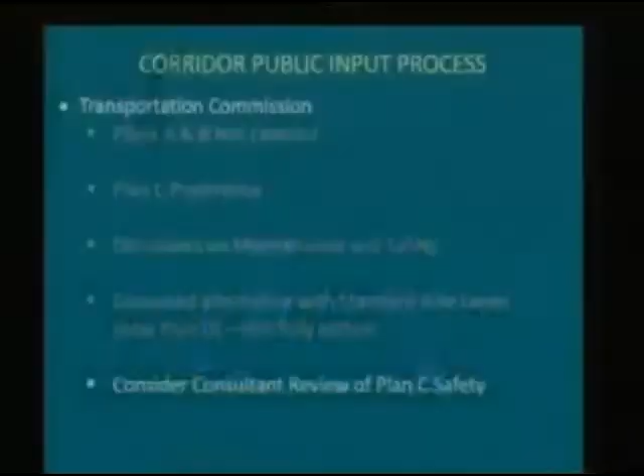They spent some time talking about a suggestion that we consider a consultant review of Plan C safety. The idea here is that with the concern about turning movements and intersection functionality with Plan C and the separated bike lanes, would it be advisable to bring in an outside consultant that is an expert in these things, that does this type of work on a regular basis, to do an assessment of our plan and let us know if they think it's viable and can be safely implemented. That was something that they seemed to like the concept of. They did not take any action with it. It's not part of the recommendation, but it is something that I think did meet with some favor. Ultimately, at the end, after an hour and a half of gyrations on what to do, they went pretty simple.

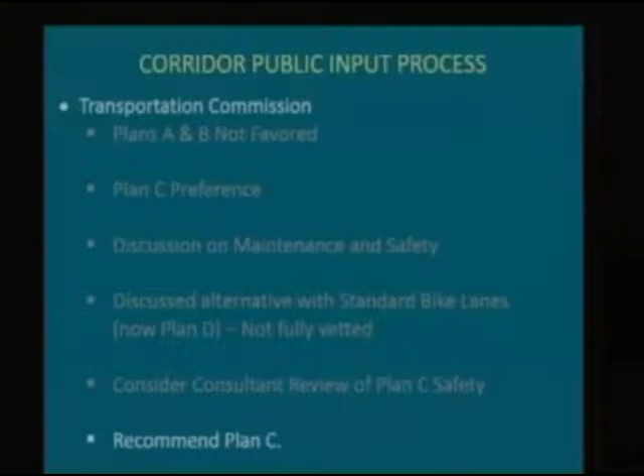And just recommended Plan C. So that is the Transportation Commission recommendation to Plan C. They did ask that we provide a good listing of pros and cons of each of the plans and concepts, and that's what's in your packet this evening. Hopefully that captures the positives and negatives of each of those.

So to talk a little bit about what's in the specific plans, and then we'll talk a little bit about budget, and I'll wrap up.

There are some elements that are common to all four plans. These are things that, regardless of which plan we would choose, if we choose any of these or even an alternative, these are things we would propose be included in any of them. So it's common to all of the plans.

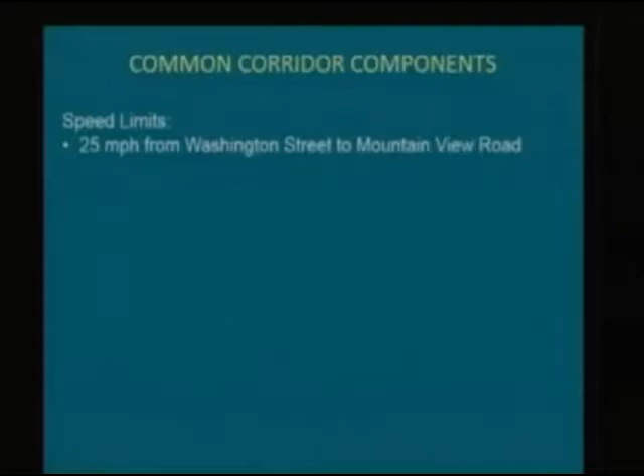First off, speed limits. It was pretty unanimous, I think, everybody we spoke with, that the speed limit which currently is 25 on the west end and shifts to 30 miles per hour in the center section of the corridor from Van Buren over to Hayes, then drops back to 25 miles an hour out to the east, be changed so that it's 25 miles an hour from Washington to Mountain View Road. So we drop that center section from 30 to 25, same speed limit the entire length. I hadn't run across anybody that had any issue with doing that.

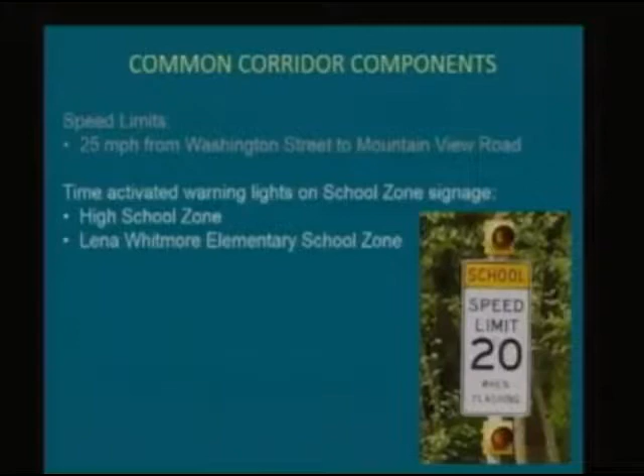One of the concepts, again common to all plans, is adding time-activated warning lights, the kind of bouncing ball light systems, on the school speed zone signs as an added visual cue. When we looked at traffic speeds, the one area where we particularly had problems was at the high school, where speeds were quite a bit higher than they should have been. The rest of the corridor fit the speed limit signs pretty well, but the high school had some issues. So we felt that adding additional lighting on those signs to raise driver awareness that they're in a school zone would be beneficial.

There are two of them, the high school and again at Lena Whitmore Elementary School. We would suggest that these be done on a timer basis. In the morning, just before school starts, they would be on for that period, then turn off. Once school begins, they would start up again and run during lunch, then turn off, then come back again in the afternoon session when school's getting out, and then turn off.

One of the things we've found, and you see a lot in the traffic industry, is if you leave something on constantly, pretty soon it's just background—you don't even see it anymore. A lot of folks probably don't even see the blinking light above Adams Street right now, but it's there. With this, if they come and go, they're more likely to catch your attention. So it's just an added influence.

Again, all plans include raised pedestrian crossings. This is truly a traffic calming measure. The American Public Works Association studies show you can see anywhere from a 12 to 18% decrease in speeds due to these kinds of devices. We're proposing three of them at these locations: the east side of the Adams Street intersection, the east side of Monroe Street, and the west side of the Cleveland intersection. I'll show you those locations in just a second.

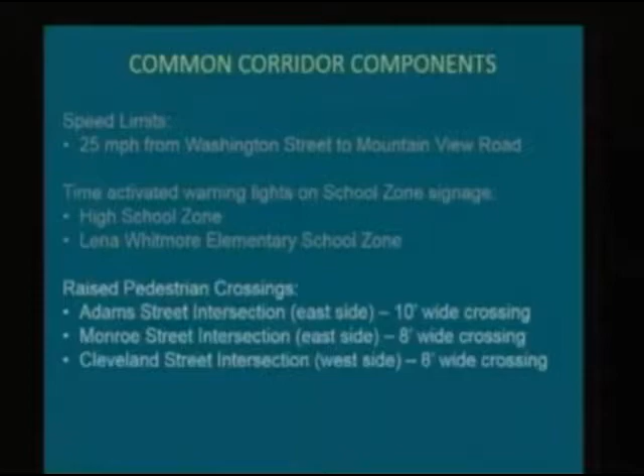A couple of things this will do for you: this vertical element, this ramp, is not very comfortable if you take it too quickly.

The steepness of the ramp can affect that. So you set this up so that if you're going too fast, when your car hits it, it's not a comfortable feeling. That helps slow people down, which is the whole idea of traffic calming. It also, through some of the markings you'll see here, improves overall visibility of pedestrians, which is important in key locations where we'd use this.

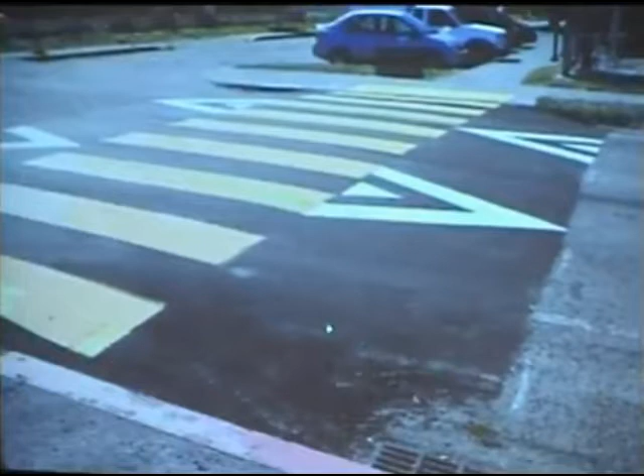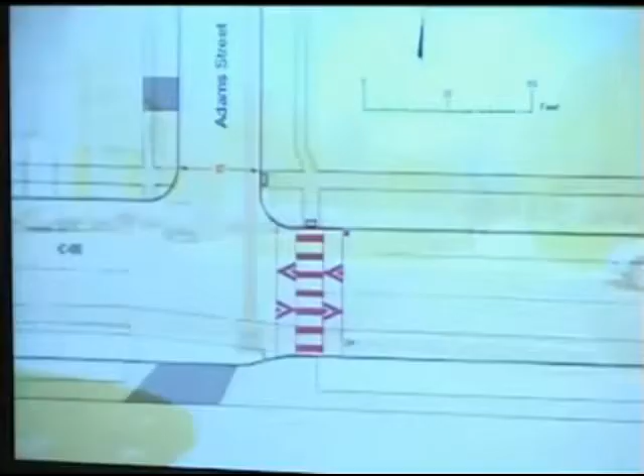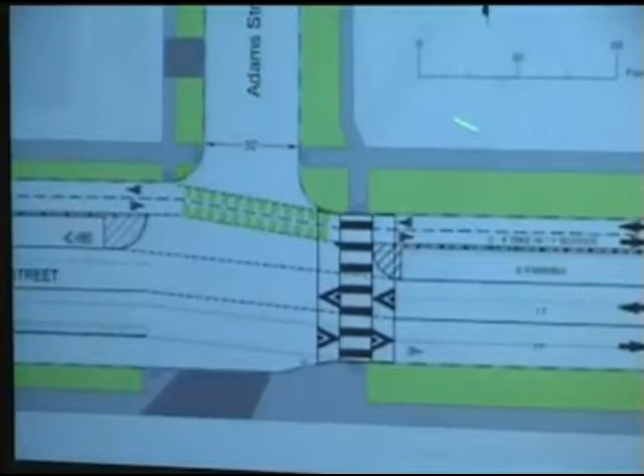Second location would be at, I should back up and tell you, Adams has the high school on the south, 1912 Center here. Very busy crosswalk. This is the southwest corner of East City Park at Monroe. Felt it would be a good location there as well.

This particular drawing is from Plan B, which has some curb bulbs involved. Plan C, again, the bike lanes going through, works well. And the next location then is out at Cleveland. Now Cleveland is on the east side of Lena Whitmore, behind the park area and the playground. There's a lot of kids that come up this way to the back of the school. So that was why they chose this third location as a spot for a raised pedestrian crossing.

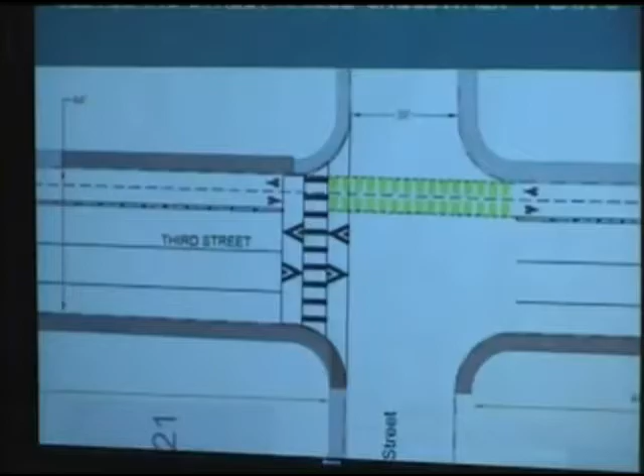Okay, other common corridor components: intersection traffic control. There was fairly unanimous discussion about changing the traffic control at Hayes and Blaine Street intersections to four-way stop control. Now today, at the Hayes intersection, the third street stops, Hayes does not. At the Blaine intersection, same thing, the third street stops, and Blaine does not. These two intersections were seen as pretty important locations with high pedestrian traffic.

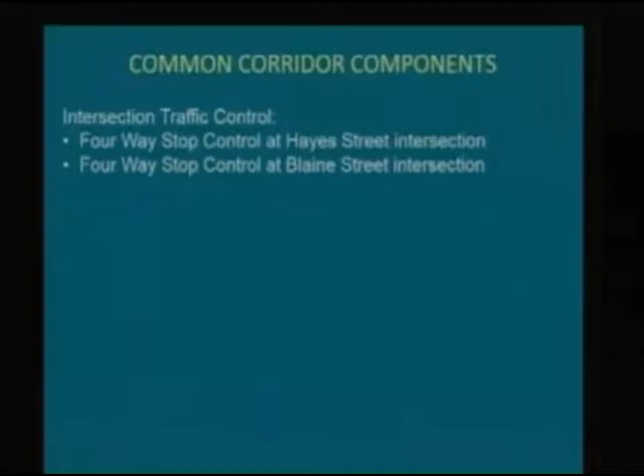Generally speaking, the Hayes intersection is likely to see fairly even vehicle load distributions coming from north-south versus east-west. Four-way stops work well in those situations, but it's also another method for improving overall pedestrian safety at those busy intersections. Blaine is just south of Lena Whitmore, with lots of elementary school kids going through there, so we felt that was a good place to put some emphasis on managing traffic and traffic speeds.

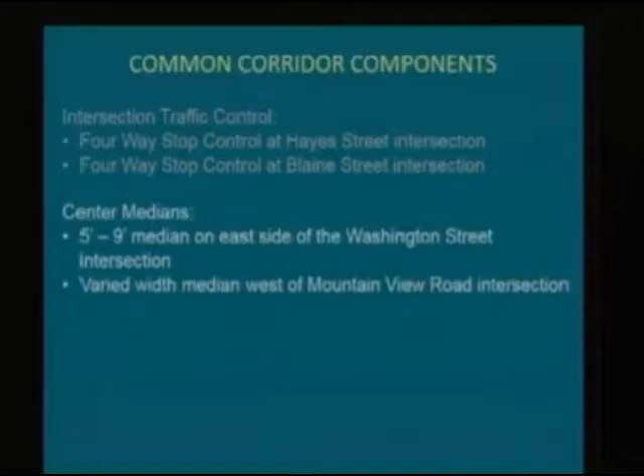Center medians, both ends, 5 foot wide to 9, actually even to 10 foot wide now, optioned for a median on the west end at the Washington Street... we didn't get that fixed, that's the Jefferson Street intersection, and then one near Mountain View Road.

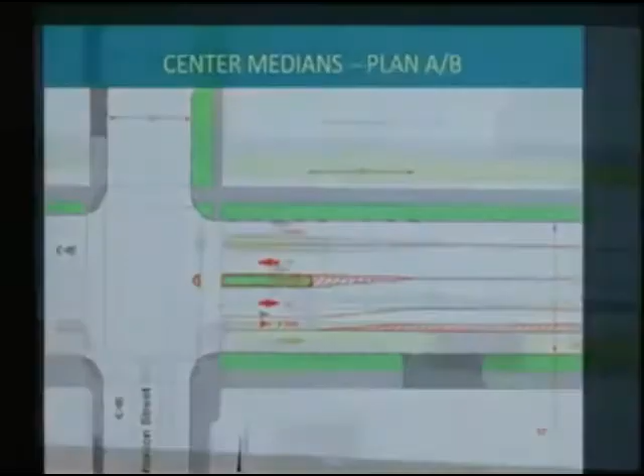Just some quick shots. This would be the 5 foot type median located just east of the Jefferson Street intersection with the crosswalk cutting through it, and some realignment through here.

A wider version, which does require removing some parking on the north side, but it gives you a much wider median. It creates a pedestrian refuge, enough width that a pedestrian can come out on the crosswalk and wait for a vehicle to see them and stop, out of traffic, so there's some protection there. The wider one gives us more options to create that entryway into this residential and institutional neighborhood as you're coming out of the downtown business district.

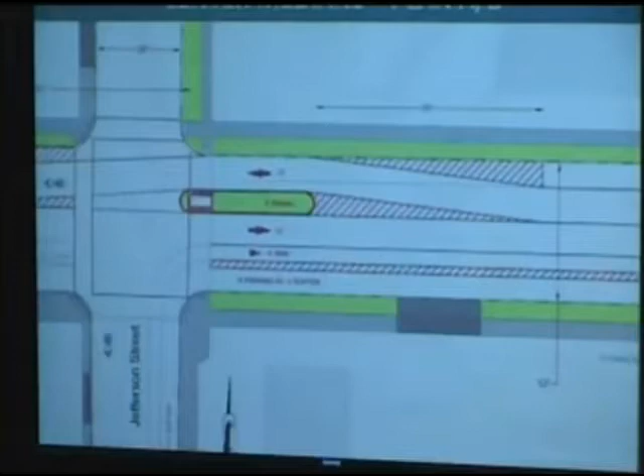So as you're heading eastbound, this is a statement, if you will, of hey, you're transitioning from the downtown commercial busy area to something different. So pay some attention here as a driver.

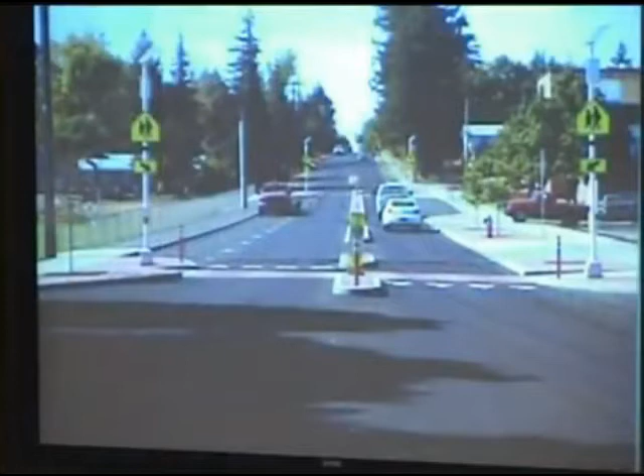A couple examples: this is one out on D Street we did a couple years ago in front of the middle school. This one's pretty narrow, but you can see a crosswalk cutting through the middle of it. So that's the idea, that there would be some kind of center median, probably a little bit wider than this. Another one at the University of Idaho by the bookstore, theirs is pretty long, with two crosswalks that cut through it. And again, some kind of treatments at the beginning to help folks notice that it is there.

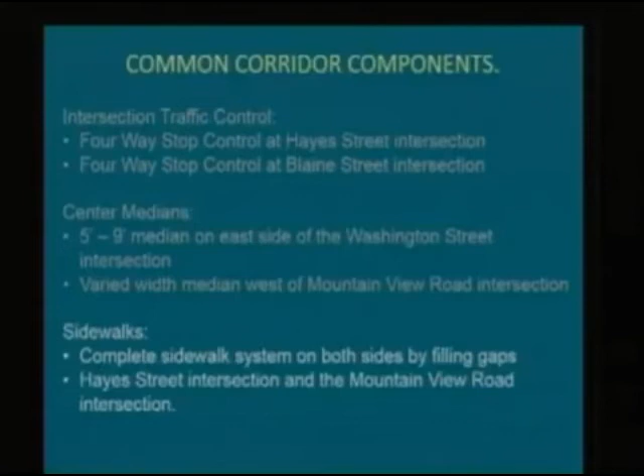The actual location with relation to the curb will vary, depending on what's out there. We work with property owners adjacent to these locations on things like landscaping and trees and other features, to try to fit them in where they'll be least disruptive, but also meet our needs.